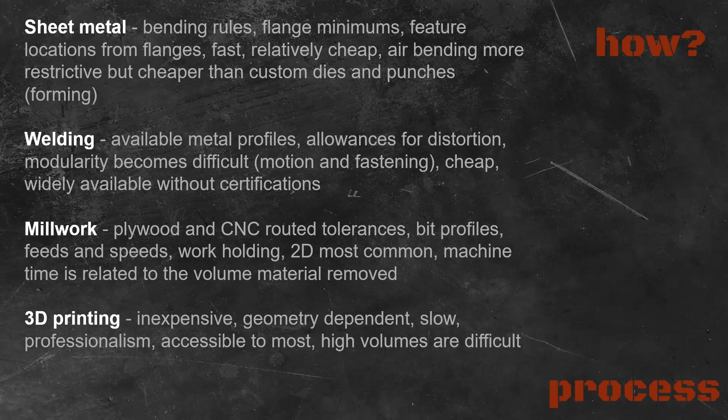Vacuum forming. We've done a lot of vacuum forming lately, especially for lighting, lampshades, that kind of thing. It's fast, it's cheap, but you have to know mold design. And the best guy here in town, I forget the name of the company, but he'll tell you how to make your molds and how to get your part to come out right. And that's going to save you a tremendous amount of money, because just like plastics, the mold is where the money's at in this kind of a process.

Electronics. I am not the most well-versed person on getting electronics manufactured. Larry is. But what I do know from things I've had made, you can get a circuit board cheap, very cheap, oftentimes free, if you watch the right YouTube ads. But you got to know what you're doing, you got to have smart people on your team. And the thing I learned is you got to have test procedures to get these cheap boards to you tested and sent out to your customer. Don't forget about the cost to do that.

Lasers are ubiquitous. They cut what we say is our thinner materials and steels. Even if you get into these new 60,000 watt lasers, we believe you're really peaking out at 3/4 of an inch max. And that's still a thin material in the world of manufacturing. So be aware of what you're choosing as you're designing a part.

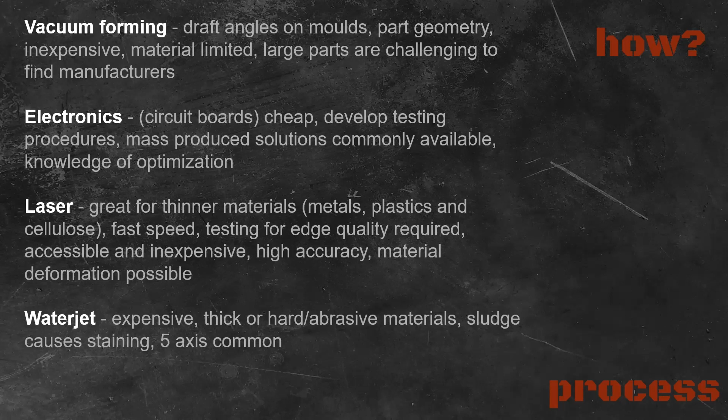Next one, machining. Listen, we can talk for 17 years about how to design for machining. I think one of the problems is the CAD systems today push machining, push 5-axis machining, push all this sexy machining, and they make you believe that it's available. It is not. 5-axis machines are tied up building the world's most innovative parts right now for guys like Musk and stuff like that. It's very hard for folks like us to get time on a 5-axis machine and make your part cheaply. So think about the geometries you're putting in there.

Think about the radius you put on a corner or a chamfer and how hard that is to do. Can you buy a bit or a tool to get that done in one operation, where you're not profiling it and spending that machine time? This is one where you need to talk to your manufacturer as you're designing, or before you're designing, to see what you're capable of.

The secondary level of process is secondary processes. So you say, well, I've got this part that's going to be machined. When it goes to the fab shop, we're working on a radar device right now, and they say, make this part. We're looking at how to economize the part, and it's a flat plate. What we've come up with is the cheapest way to get a bunch of discs is you don't buy a plate, you buy a round bar and saw it into discs. Your material utilization was like 38% higher. And this is a big project, so that amounts to savings of something like $20 million.

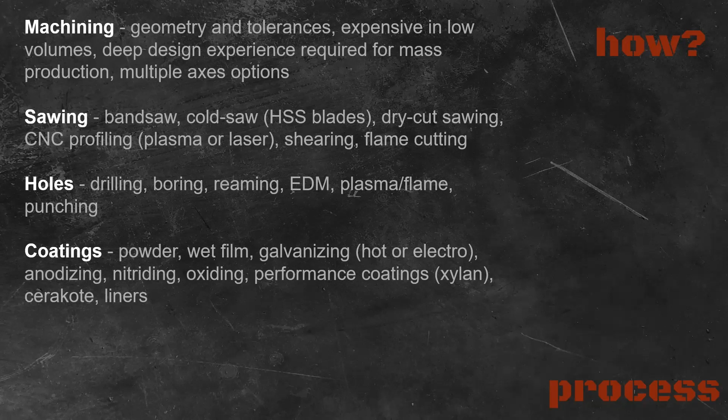And the second part of coatings is you need to know, like we said, if it's dangerous and allowed in your market, which ties into compliance.

We'll get there. This is why we're here, design. How do we design for manufacturing? This is big and broad, but I'm going to cover the low-hanging fruit.

We use Fusion 360. We use Fusion because it is all-in-one, because it's at a great price point. All-in-one means it has our CAM in it as well, and CAM is what you use to tell your robots how to move. Because we have the robots, we need it. Because you're a designer and you want your stuff made with my robots, it behooves you to use the software that I'm using. That's the trick.

Ask your manufacturer what formats do you want your files in. Ask them at the beginning. And if they tell you a paper drawing is fine, I'll be honest with you, in this day and age, be wary of their capabilities, because they may not have the CNC equipment that you think they have.

Some others on the marketplace, SolidWorks was a big dog in product manufacturing. We find that is decreasing, they're losing their market share. Onshape is kind of coming up, it's expensive.

SketchUp, don't come to me with SketchUp drawings. Rhino, the same. Rhino is great for architects, its Grasshopper is a fantastic tool. It is hard to get your files out of Rhino to a manufacturing process, including drawings.

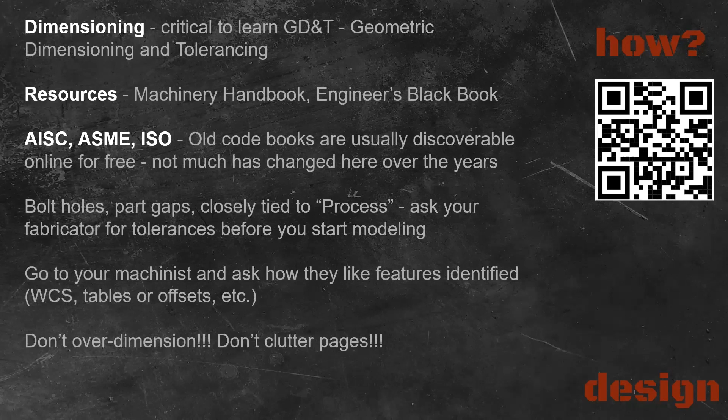That is a surefire way to get things kicked back, because the world is not perfect. And if you constrain something, people won't make it. Let's see what that is.

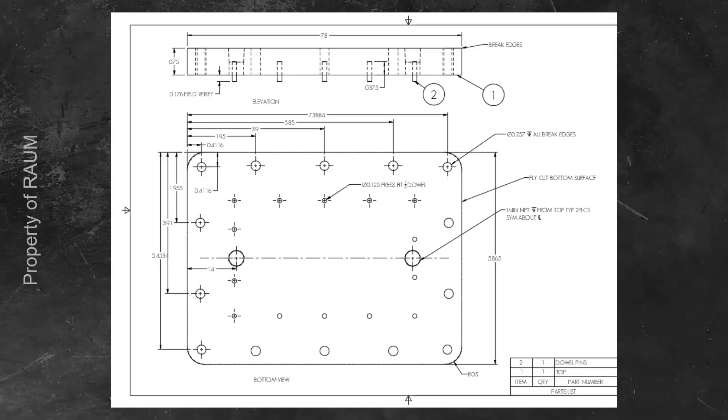Hardware and fittings. If it's not in the McMaster Carr book, the big yellow one here, don't put it in your model. Stop trying to invent a screw or a clip or whatever. What else has McMaster Carr done? The most brilliant move they've ever made, it probably has netted them billions of dollars: they give you the models for free. Drag that in there, the part number goes in your BOM, and you can order it from them. Brilliant.

Repeat your fasteners. Use a 1/4-20 bolt in all your bolts. That way your manufacturer is ordering one, because 1/4-20 bolts, let's say, come in packs of 100. Well, your thing only needs 2, or 37. But if you change it all up, I've got to buy 10 packs of 100. Keep them the same.

Reduce the parts, I'm making fun of Spencer here. Don't make brackets for brackets. Don't stack up components that don't need it, just make one bigger component. Reduce your number of parts. Look at your model, sit with your friends and say, hey, how can we reduce this? Design review has never and should never be a way to make fun of people. Everybody gets lost in the weeds at CAD. Review it critically and fix these kind of things.

Minimize assembly complications. What does that mean? Folks in the factory or wherever it is, they have to put this stuff together. Think about how it's going to be put together, do an exploded view of your model and look at how it's going to come in, and try to make it easier to be built.

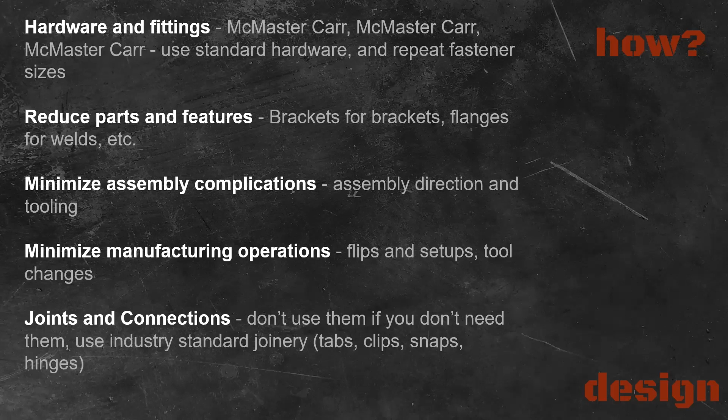Joints and connections. This is hard, this is real hard. Adding joints, making things bolt together, making them modular, making it hinge, making it move, is the most expensive thing in manufacturing, I think. You've got to add parts to do that. You have tolerances, you have interference, you have all the problems around a thing. And it's not just easy to make any materials join together, especially if they're dissimilar. So try to not do that. Or if you do, use best practice, make them snap, lock, click, whatever. Look through McMaster, see what's available already to join your products.

Materials. I like materials, these are the things we normally buy. We buy a lot of steel. The typical thing we're buying is A36, that's called structural steel, low carbon. You can get cast alloys, which are your stainless steels, high alloys, which are starting to talk about Inconels and Monels and Hastelloys.

We typically buy from North Shore Steel because we need MTRs, and MTR is a material test report that validates what we bought. And when you are specifying where you want your steel from, or in a lot of these products from, you must, to speed up manufacturing or get a handle on your costs, specify a country of origin. Here in the US, and in Houston and oil and gas especially, we're not allowed to buy steel from China. You must say that or they will give it to you, because a common theory is that a lot of the steel from China comes from Russia, who are our mortal enemies. So these implications are huge, even at a small level.

We buy a lot of our sheet steel under 3/16 of an inch thick from Curtis Steel. This Curtis Steel is the other type of guy you need to call and say, hey, what do you have, what can I get? In sheet materials, it matters because it only comes in certain widths and lengths. So if you're designing a part that's outside the bounds of that, you've got to get it custom made. Custom mill roll, which comes on a train car, is hundreds of thousands of dollars for one roll.

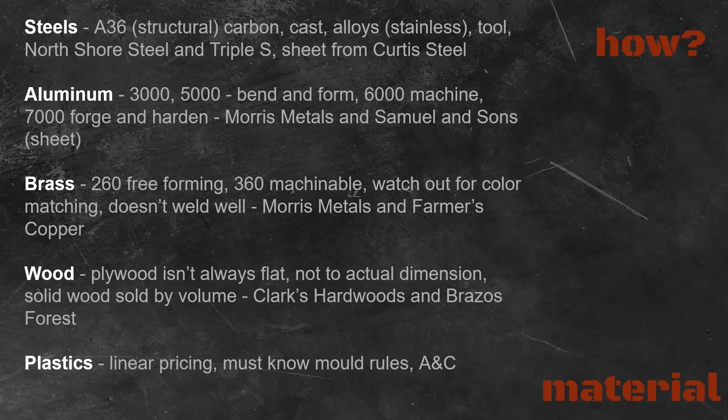Okay, the environment - this is tough. The easiest way to learn how to tackle this is pay attention to things as you walk around.

A common trick we try to pull on our interns is we say, oh, we can identify that metal, just lick it, just lick that metal. And they will, they'll lick it. And why that's important is you need to know as a designer - like these chair legs, I'll tell you right now, these are made out of steel. But if you go and design them as aluminum and tell me to make them out of aluminum, I will. And then we're going to do another iteration, and I'm going to get paid again. So just know what things are made out of.

A great tip, I don't have it with me - I carry a little tiny knife in my pocket that has a magnet on it. You can ask any of my guys that are here, I walk around and just touch things with that magnet. Is that steel or is that aluminum? I want to know, right?

So test as you go. Order the samples - any one of the big vendors will give you samples of anything. Test them, drop them, smash them, expose them to chemicals. Pay attention to how the finishes do. The biggest got-you in this category is going to be your coatings. How do the coatings perform in the environment?

How do coatings get damaged during manufacturing? We have this issue right now in our shop. We sent something to paint because the customer is in a rush for it, and we're like, hey, go on this design, we need a test fit. And they said, no, don't worry. We said it's gonna get scratched, and they said we're cool with that. Get that in writing, folks, if you have to go that route, but know how these things are gonna survive.

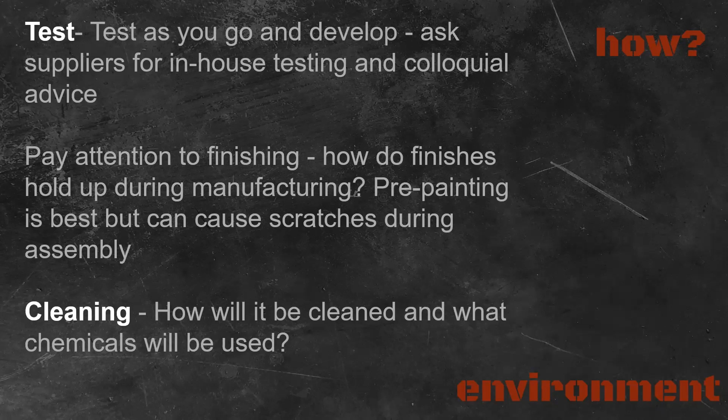Compliance - this is tough, especially if you're new, because you don't know what you don't know, right? Ask the customer what the compliance requirements are. We build for aerospace, medical devices, extreme oil and gas. A lot of our products now, the reagents are known carcinogens where we can't even receive it in because it will kill us. So you have to say, what is the governing body here so we know how to be safe?

They're the ones that know - you will never know all the requirements. Go to the trade shows, you've got to go, because there'll be so many people giving you so much information with so many of these lectures, and a lot of times free booze and all that, and you will learn a lot.

Don't forget, outside of regulations and regulatory governing bodies, there are internal standards and specifications. If you've ever done work for Aramco - two books, 900 pages of internal specifications. Make sure you don't ignore those in your design, right? It'll get you.

So that's it. Any questions?